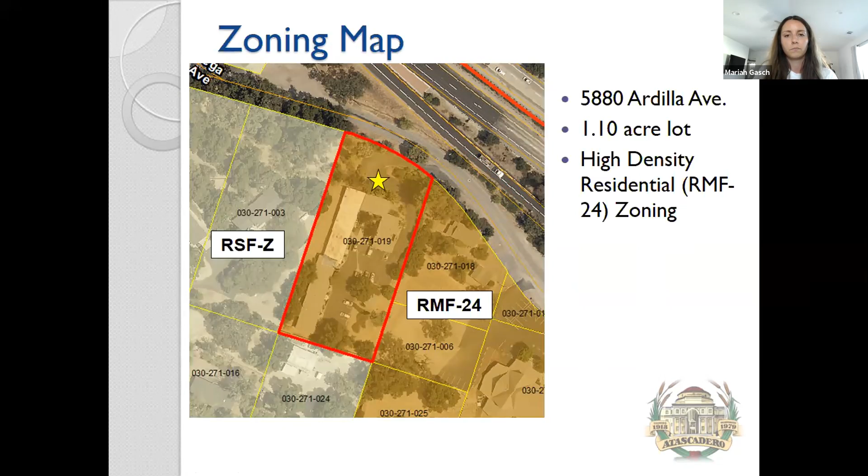Here's just a little bit of a better aerial. You can see where the existing driveway is and then the existing building, which we'll talk about.

A little bit of background about the site: it is currently developed with a multifamily building with a total of 13 units, including 1 manager's unit. The makeup of the building has 1 studio, 11 one-bedroom units, and a 3-bedroom manager's unit.

The project was presented to the Design Review Committee on March 11th, 2021. In addition to talking about the design, some of the big discussions were about the parking constraints and the accessibility for residents, which we'll talk about in a little bit.

So the project being proposed is to add a 2nd story onto the existing building. The 2nd story would have a total of 19 units, making 32 units total on the property. The 19 new units would consist of 11 studio units and 8 one-bedroom units, but the first floor unit configuration would stay the same.

The project also includes the addition of a new community building with a little bit of storage, as well as a courtyard for the residents to use. Some other changes are upgrades to the parking lot to modify for accessibility, as well as a fire truck turnaround. This also includes moving the trash enclosure.

To talk about the density, as I'd mentioned, this is a residential multifamily 24 lot, allowing 24 units per acre. So the zoning allows for a maximum density of 27 units on this property. However, state law allows projects with at least 20% of units affordable to receive a density bonus. So with this density bonus, the maximum density allowed on this property is 36 units, which the 32 units being proposed falls within.

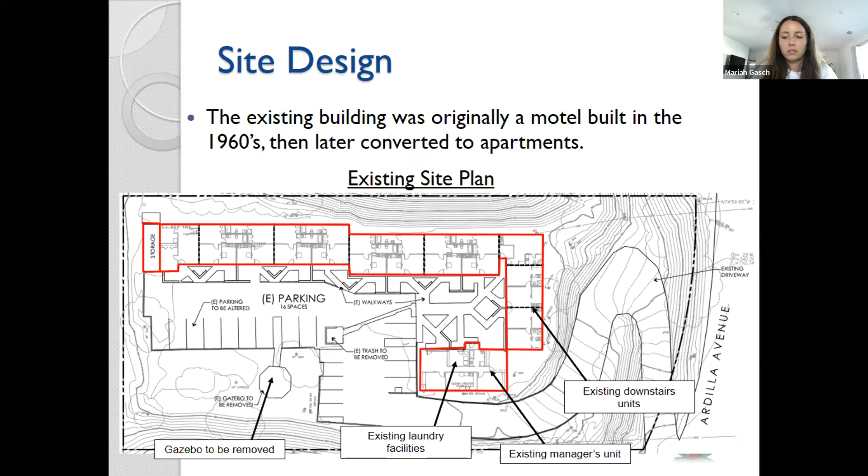There's a gazebo down at the bottom that's proposed to be removed. And you can see where the existing driveway is right now, and that'll be utilized with the new addition.

Adding a second story to the building increases the height from 9.5 feet tall to 22.5 feet tall. Again, the first floor would continue to have the 13 units. The manager's unit and laundry facility would be reconfigured a little bit, but they would stay largely the same. And then the new second story would have 19 new units.

Since the project is 100% affordable, the state code allows the applicant to request up to 4 concessions or exceptions to the city's requirements, which the applicant has requested some exceptions, which we'll talk about.

As I'd mentioned before, that driveway is going to continue to be utilized, but they are adding a new access for fire trucks to use, and this would just be used for emergency vehicles. So the applicant is proposing to add some removable bollards there, to ensure it would just be used by emergency vehicles and not by everyday drivers.

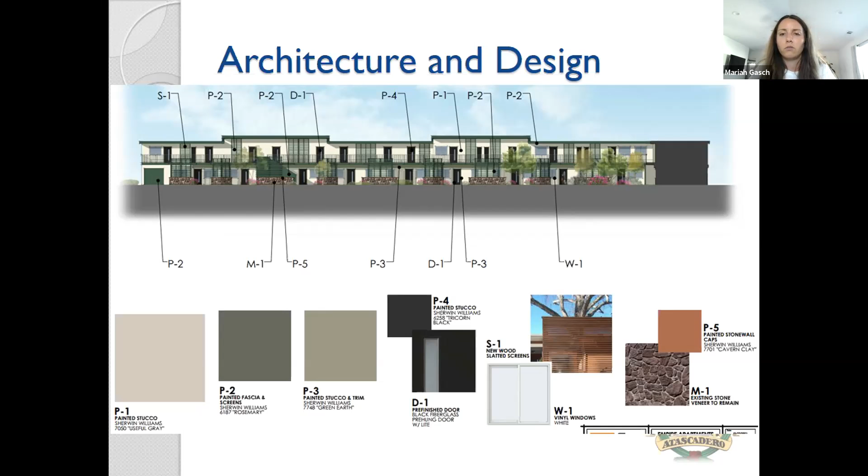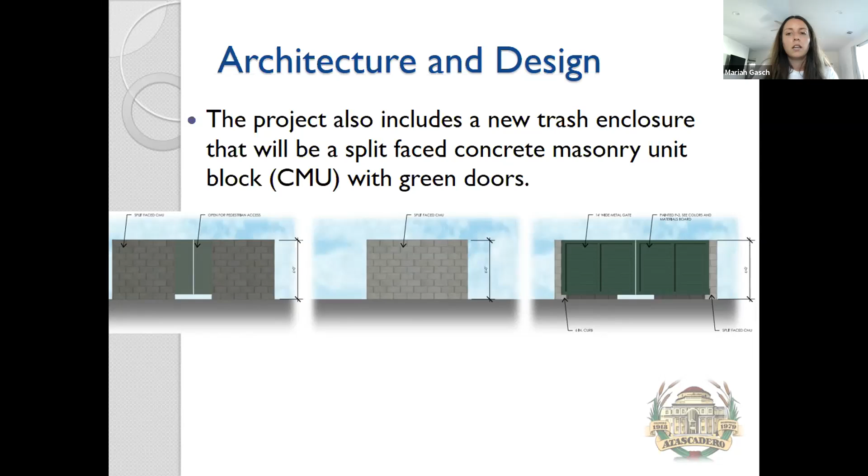Moving on to parking, this was one of the bigger discussion items that the design review committee had back in March. The existing parking lot has 16 parking spaces, and the applicant is actually proposing to reduce this down to 15 spaces. This would account for increasing accessibility, including a new accessible parking space, and it would include the new fire truck turnaround.

The state density bonus law sets a maximum parking ratio for projects providing affordable units. So when projects include affordable units, there's only so many parking spaces that the city can actually require. Per the state law, the city can require a maximum of 33 parking spaces. So obviously the 15 that the applicant's proposing is a pretty far reduction from this 33.

This is one of the concessions that they're requesting in accordance with the density bonus law I mentioned earlier. And here's just a table outlining the parking and the ratios being requested.

The Atascadero Municipal Code requires a total of 56 parking spaces for a project such as this. With the maximum density bonus requirements from the state, again, we can require up to 33, and then the applicant is proposing 15. So this is a pretty big reduction, but after talking to the owner and operator...

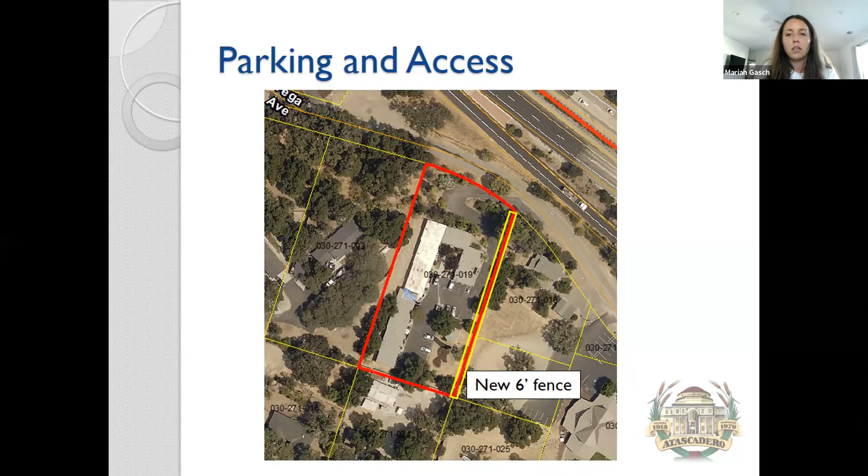Another thing the design review committee discussed was access to the site. There's a lot of foot traffic coming through adjacent properties to the east, so to discourage people from crossing those properties, a new 6-foot fence would be built along the property line to delineate it. The applicant has proposed this on their new site plan, and we've proposed a condition that this fence be added prior to requesting a final planning inspection.

Moving on to landscaping, approximately 41% of the site is proposed to be landscaped, well above the minimum 25% required by municipal code. The code also requires a minimum of 10% of parking areas to be landscaped, with shade trees provided a certain number of parking spaces away. Another requirement is that trash enclosures be landscaped, as well as street trees along the frontage, and a minimum 5-foot landscape strip within side yard setbacks.

These requirements are difficult to meet on this site because it's already built out. Adding some of these landscape requirements could result in a reduction to the already reduced parking or the number of units the applicant is able to build. So staff has made a finding to allow an exception, which we'll talk about shortly, and we're recommending no changes to the proposed landscape plan. A lot of the site near the adjacent property lines is pretty open with just grassy vegetation, and new vegetation would be added primarily around the parking lots and within the courtyards and walkway areas.

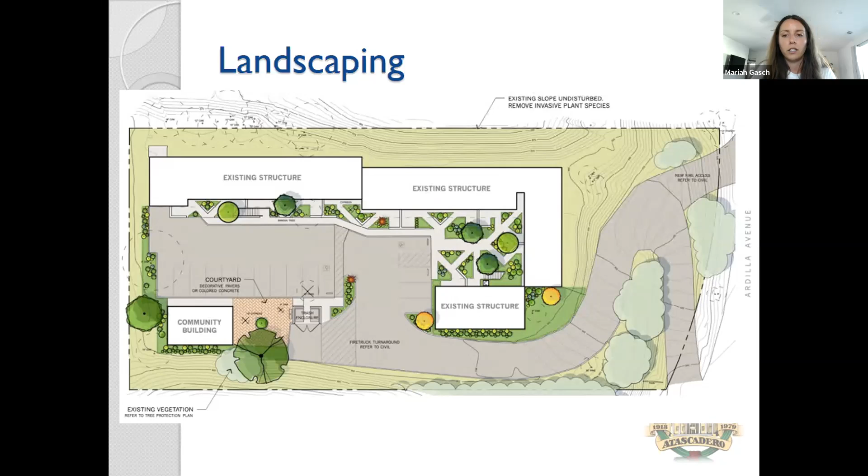Moving on to multifamily standards, the municipal code requires 10 cubic feet of enclosed storage per unit, not including closet space, as well as 9,600 square feet of open space, which can be provided in a shared location. The applicant is proposing 1 bedroom closet per unit, with Unit 3, the manager's unit, having slightly more. As for open space, the new courtyard would be almost 900 square feet, the existing courtyard between the buildings is about 1,250 square feet, and there are individual downstairs patios. These don't quite meet the municipal code requirements.

These are two more of the concessions the applicant is requesting with their density bonus. Staff is in support of this, again due to the existing layout and steep topography of the site. Additional storage and open space would also likely result in a loss of units or more extensive grading.

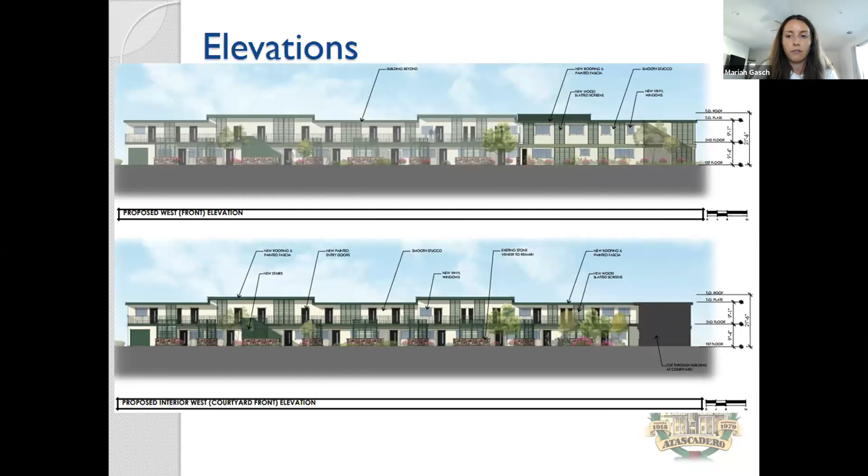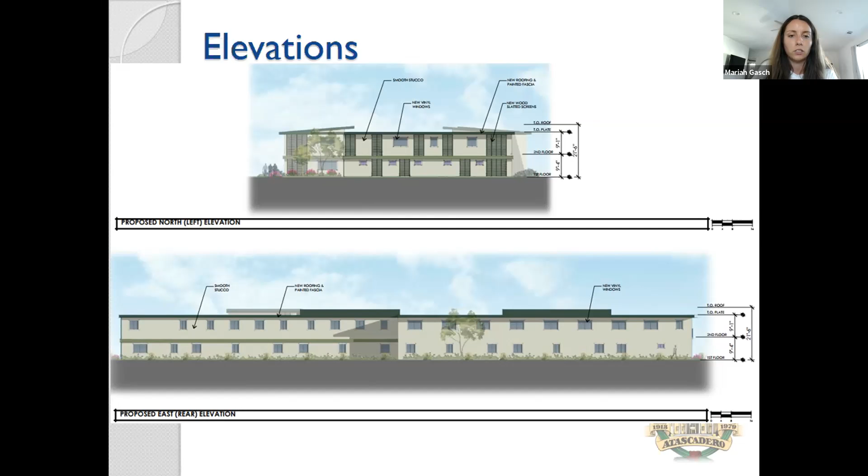Here are some elevations of the proposed project, which we looked at earlier, but you can see it matches what's there today—it's just getting taller, up to about 21.5 feet. In the top picture you can see the slanted roofs facing inward toward the inner courtyard area, and the back would be pretty simple with windows.

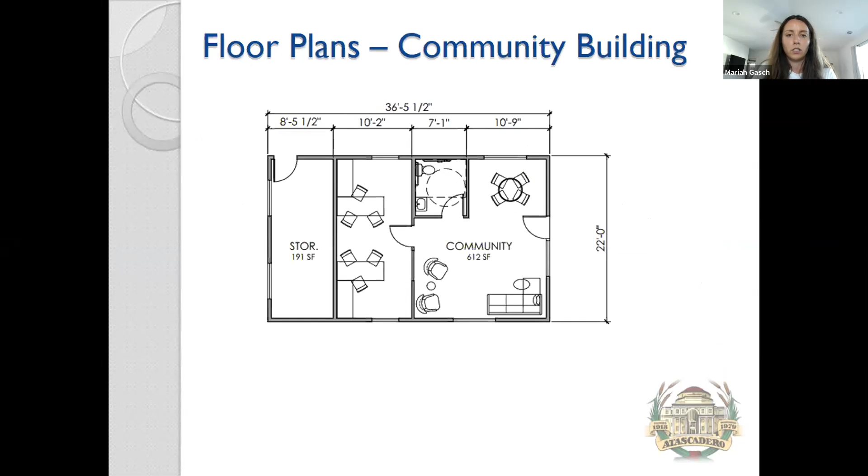Here are some finished floor plans. This is the first floor, which is existing. The second floor has quite a few more units, some smaller, and this is the proposed community space for residents to utilize.

The conditions of approval are within the staff report, but feel free to ask if you have any questions. The project qualifies for a Class 2 categorical exemption from CEQA for construction of an infill development.

Going back to the landscape exception finding, the municipal code allows the Planning Commission to grant an exception to landscaping if it can be found that existing vegetation, topography, or structural arrangement preclude the need for landscaping. We believe this can be met since the site is already developed and has significant topography.

Staff's recommendation is that the Planning Commission adopt the draft resolution approving the amendments to the previous conditional use permit, allowing the addition of 19 units to the existing apartment building for a total of 32 units, consistent with the previously approved project, based on findings and subject to these conditions of approval. As always, the Planning Commission can approve modifications to the project, determine more information is needed and refer the item back to staff, or deny the permit. Staff is available for questions.

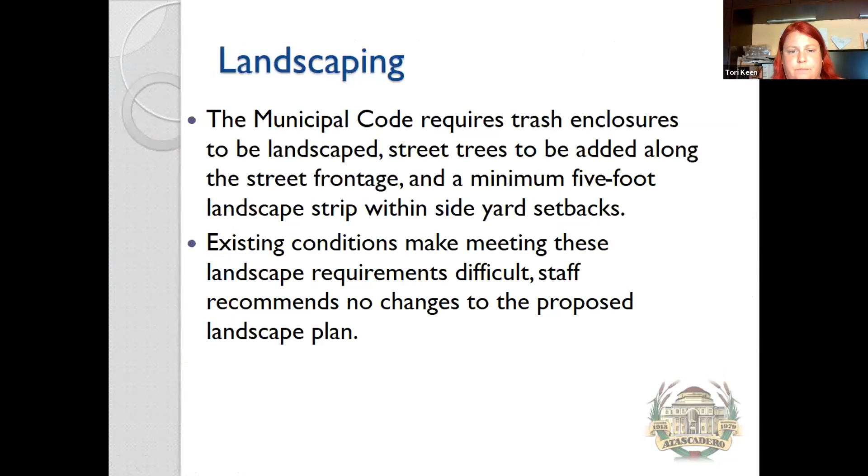Yeah, let me pull up a picture here. Mariah, related to that, has the applicant submitted any profiles of that? The slopes are really steep through there, so I'm curious how they're going to accommodate that drive right there.

Yeah, so the applicant, we did go back and forth with them on that slope, and they did confirm - I can't remember, Kelly, do you recall what the slope was? Our fire chief took a look at it and confirmed that the slope met the fire truck standards. I think the idea is that it's not exactly the best approach for everyone to be using. It's kind of a sharp left turn there, and it's still a pretty steep driveway. So I think that's the reason.

And then having two open driveways gets kind of confusing. So I think that's the reason for keeping the existing driveway and adding this one just for fire truck access or emergency access, I suppose.

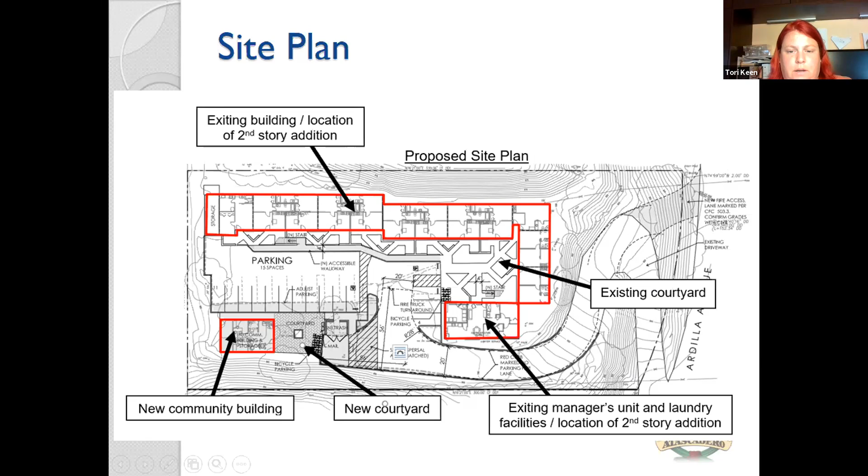Can you show the Google image of the map? Okay, so can we, I hate to do this, but that tree that's right there, could we have them cut that down for better viewing? I don't think they'd need to put landscape somewhere else, but it seems like a really bad blind corner. I've driven down that road a few times and people do speed up to that intersection.

So since we have an opportunity to do something about it, I'm just wondering what our options are. Or are you referring to the tree in the right of way right there? Yep, that one right there.

Yeah, I think what we could do is add a condition that the city engineer review the sight distance out of the existing driveway, and that they implement any recommendations he has for vegetation removal. Because if we are going to increase the traffic there, I think we need to take that into account and make sure people can get in and out of that driveway safely.

That's it for me. Jason? Thank you, Tori. I don't see any pedestrian walkways, any sidewalks or anything along the road, so I'm kind of confused. The people who live here, if they don't drive, they ride bikes or walk, but that's a precarious road to be walking along the side of like that. Is there any plan for putting in sidewalks in that area?

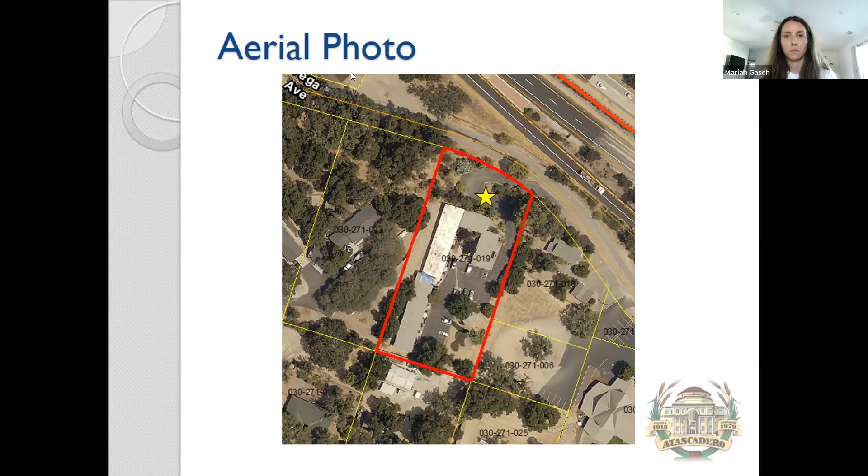If the applicant or their representative would like to speak to the planning commission, you will need to unmute.

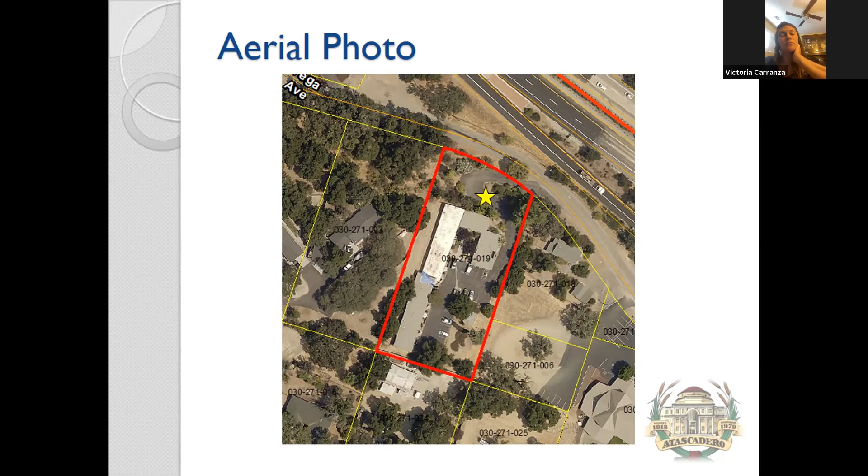Obviously that's something everybody would like to see happen broadly, but it's very rare and extremely difficult to produce. As a result, you see the severe housing crisis we have now. And if we don't start thinking outside the box on ways to solve the situation, it's obviously going to just keep getting worse.

One thing I wanted to mention is that the Empire Inn consists of 13 housing units now, and we're going to 32. But as was discussed tonight, it's important to look at how it's actually operating. We've been operating it for close to 30 years now, since 1991, so we know the kind of clients, how it functions, and what the needs are, and we feel very confident in the expansion and the parking ratios.

As already mentioned, it's pretty much 100% occupied by what we classify as special needs households, and we control who moves into the housing and who does not. Of course, they have to income qualify and be low income. But if they don't fit the needs of the property, like if there's too many cars, we don't rent to them. That hasn't been the case though.

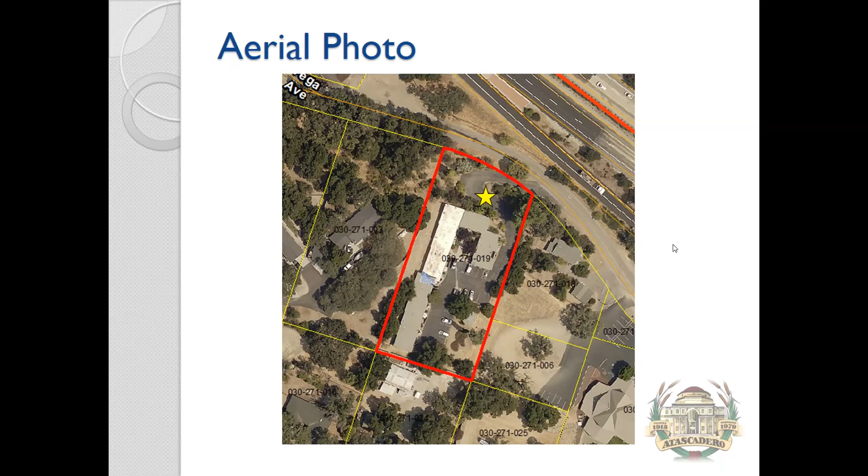Hi, I'm Adriana from Arris. Mariah, I don't know if it's possible for me to share my screen. Yeah, let's see. Are you able to now? Yes. See?

Okay, so I'm just going to give an overview. Mariah's done a great job already, so I'll be brief on anything that overlaps.

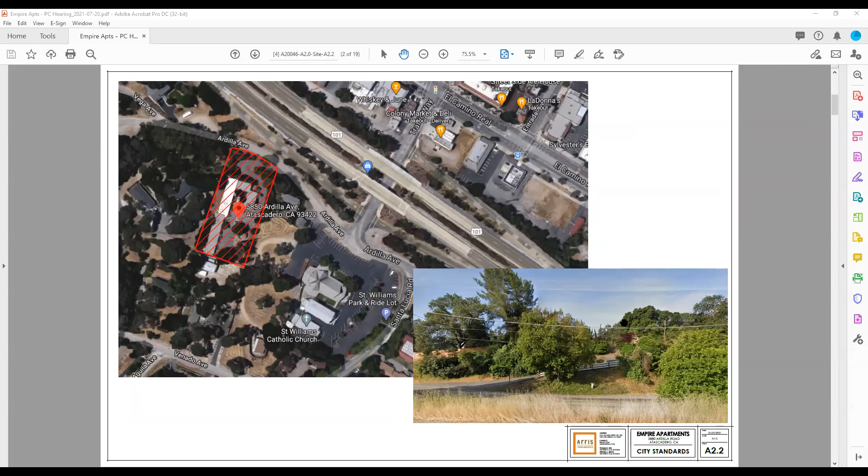Just a little zoom out of this site area too - we are close to 101, but also very close to El Camino, so the walking and biking is convenient, as we've already noted. This picture shows the driveway off of Ardilla and how it's a steep sloping site, just so we're all on the same page. This will be 100% affordable for rent, owned by HASLO and managed, located near El Camino and Traffic Way, close to transportation and amenities.

We're adding a second story over the existing 12-unit building, increasing the total number of units from 12 to 31. We're also adding a new community building for residents. Per the state density bonus law, the city is required to provide 4 incentives or concessions, and we are requesting, as Mariah mentioned, reduced parking, reduced open space, and reduced indoor storage.

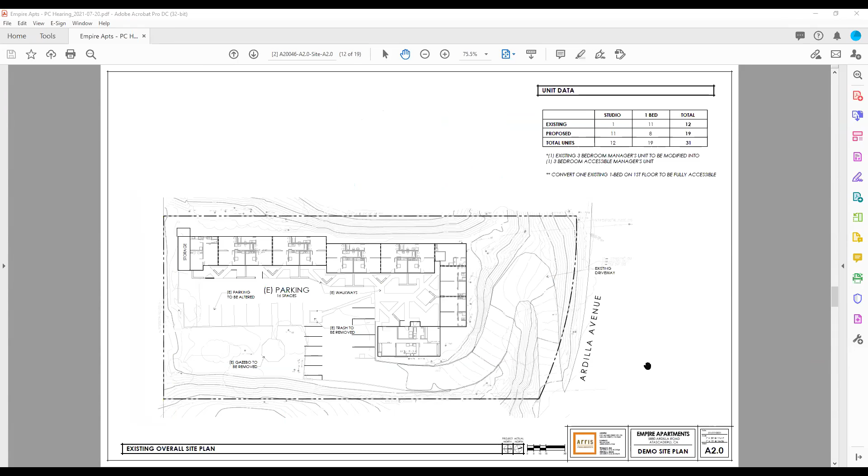This is the existing site, and this is the proposed. This is the entire area we're putting a second story over to gain the new units. This is the new community building over here. This is the new courtyard, and this is an existing courtyard that already exists. Each unit on the ground floor also already has kind of a patio with planters.

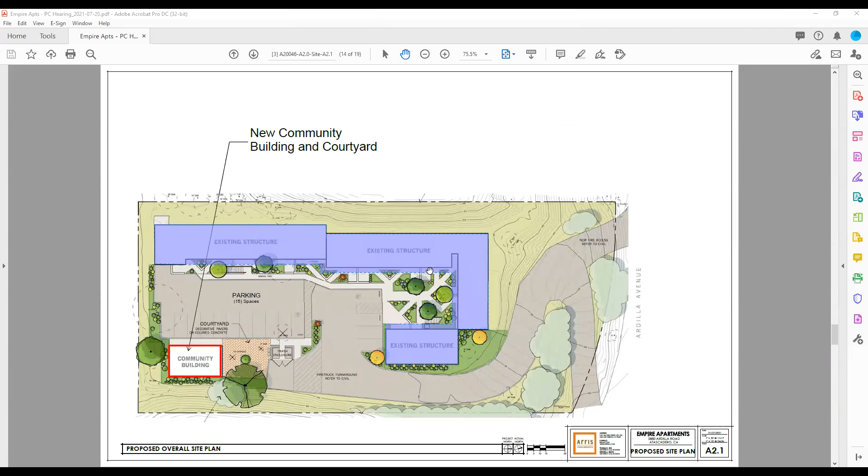The parking was modified mainly for accessibility - for all the units, we have some disabilities, and we want to meet code requirements but also tend to those who live in these units. So we have an accessible aisle, which wasn't there before - you would have to go into the parking drive aisle. That's what shifted these parking stalls down. We also have actual accessible stalls with the appropriate drive aisle. This also allowed for the fire truck turnaround that wasn't there currently.

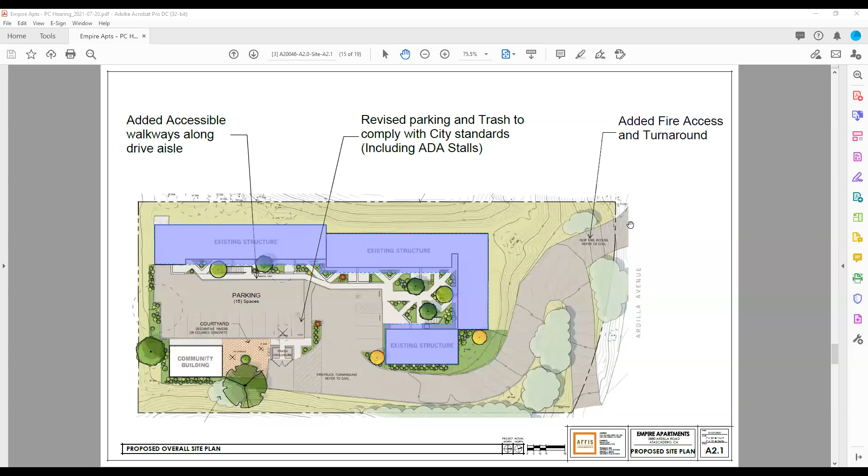And then this is the new fire access as previously mentioned. We've also added the bike parking and the 6-foot fence. These are just images showing the second story on top, the community building. And that is it - I will also be available for questions as well.

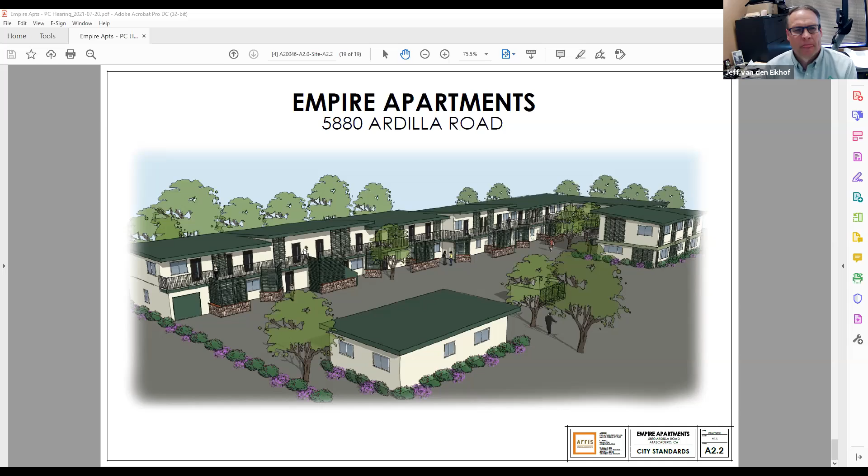I have one, Adriana, following up on one of the questions previously. I didn't see any profiles or anything of the fire access road or any slopes. Just curious about that - that slope seems really steep. Wasn't sure if you were going to have to adjust the entire driveway. It will be a small portion and there will be retaining walls. I do have... let me see, I think I only shared that specific thing.

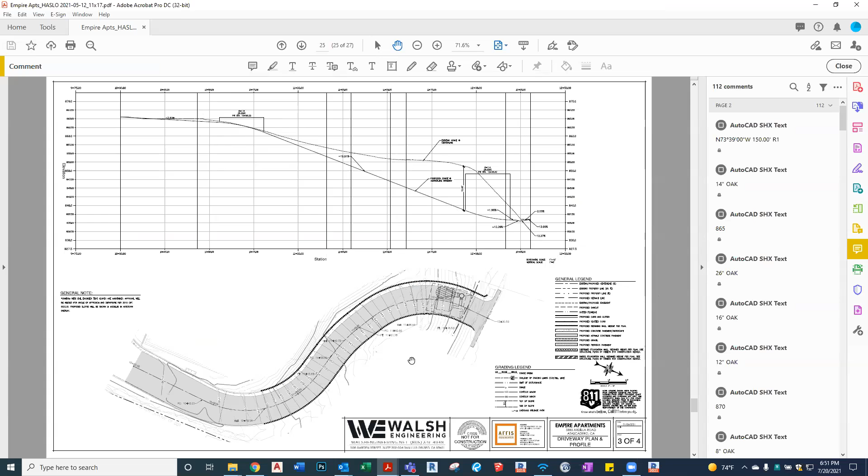So I'll share my whole screen. This is the profile of that driveway, so it is very steep. And this was the existing profile, as you can see, so it's extensive work here. I did not follow up with Walsh Engineering prior to this meeting, but I do believe we are abandoning it after looking closer, because of how much regrading we are doing. I apologize, Mariah, for not looking at that before this meeting.

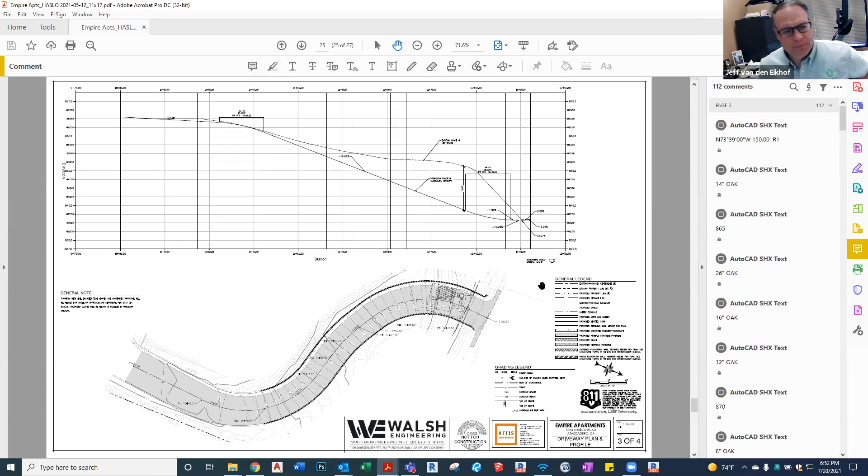It looks way different. That would make sense, and it would actually improve the sight distance from what I can see there. Yeah, I was curious as to how that was going to happen, because the steepness of the grade, it didn't seem like you could have that other drive.

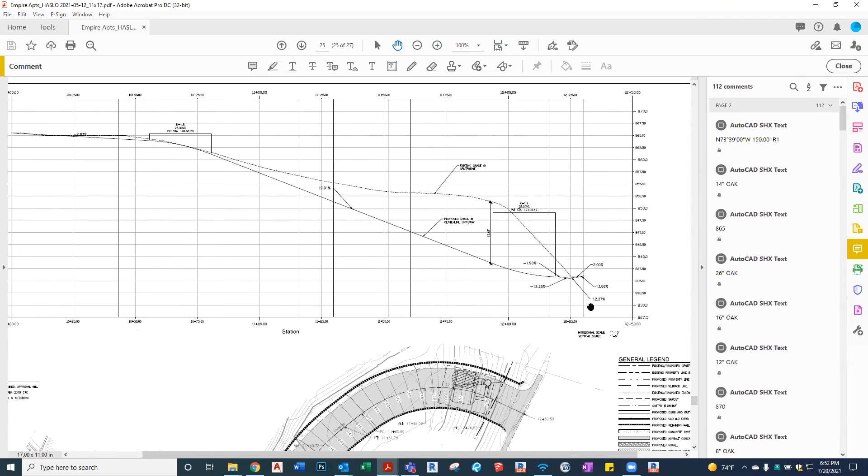Right, yes. The dashed line here is the existing, if you can zoom in a little bit. It's still quite different - still steep, but still within the allowable. I see, instead of doing the jump up there. Okay, Randy, did you have questions?

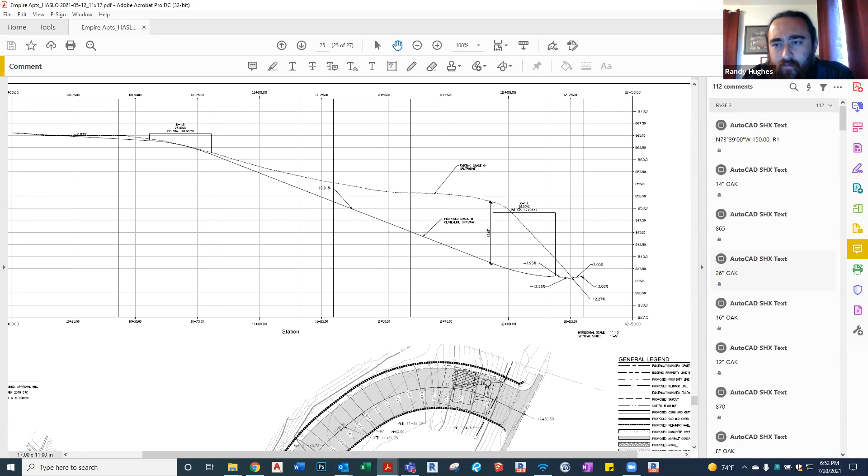Yeah, actually, I understand that this is geared towards more like special needs. Are there going to be any situations where someone might need a caretaker, or are you guys kind of more just filtering that out in the process of when you're deciding who to rent to?

I'm going to let HASLO comment on that. Scott, would you mind chiming in on that? If you're trying to talk, you're muted. I don't have any controls on my computer, so I think you guys have to unmute me maybe somehow. But can you hear me now? Yeah. Yes. Oh good, okay.

So, with respect to caretakers, we wouldn't deny somebody, but it's very unusual to have a caretaker that would live at the unit. There might be somebody that comes in to help with daytime stuff, and I think there's probably a couple there right now having a worker come in for a couple hours a day. Typically, especially because these are poor people, if they need help with housekeeping or activities of daily living, they apply through a program called In-Home Supportive Services, but it's not easy to get those hours - they dole them out sparingly. So it is possible, we just don't know who's going to walk in our door needing those kinds of things.

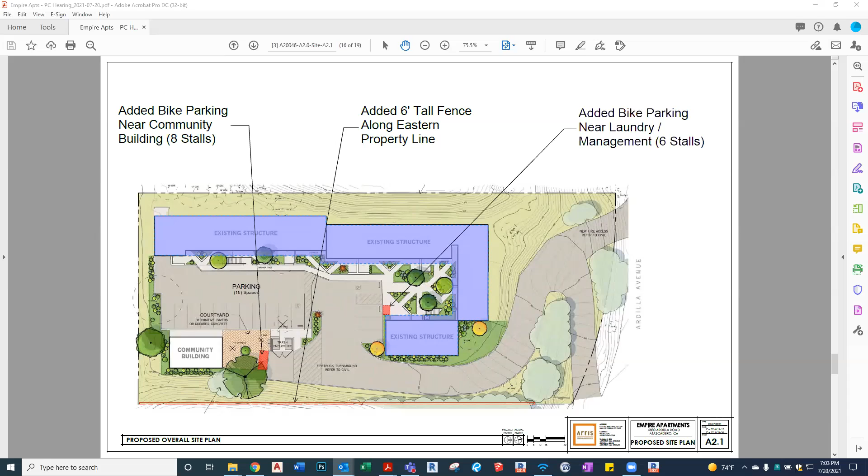We always have a local preference. We advertise and do outreach, and it always fills up with local. Now, how local gets defined, people move around so much. Our first preference would be Atascadero, but then you have somebody who's living in Templeton, but they grew up their whole life and went to Atascadero high school. So are they considered local? But we always have local preferences on all our projects, and that's what we would do on this one as well.

Okay. Any other questions? Oh, I just had one.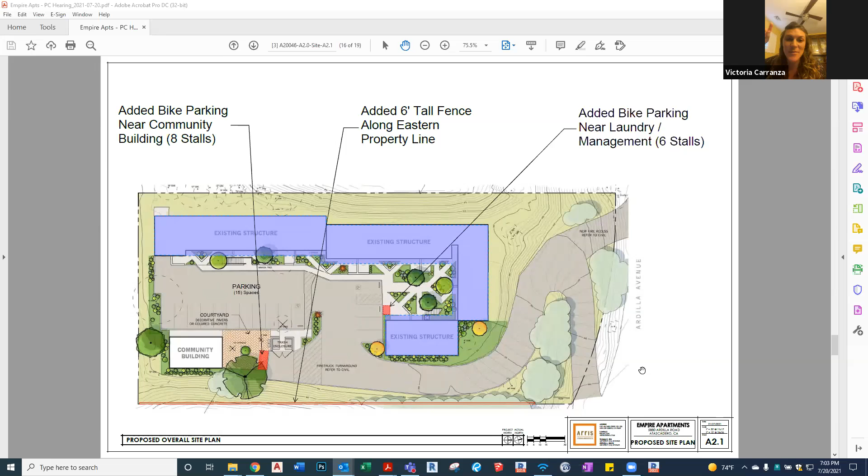This is a joke about the weeds here, but I actually wanted to ask about the weeds, the landscaping behind the building. It said invasive species removal, and since we don't really know much about that at all, I wondered if that was something the city should put on their radar as an issue in general. But what kind of invasive species would you be removing?

I'm not 100% sure, it was the landscape architect who did that. So I don't have names or anything, but I think the idea is just to clean up the site.

Okay, thank you. Well, we'll go ahead and open it up to the public. Beforehand, we received a couple letters. Annette, can we have those read into the record?

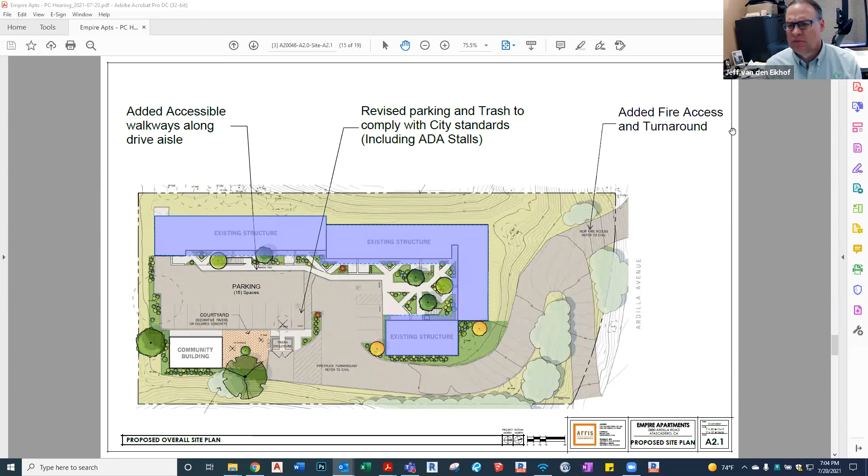Yes, can you all hear me? Okay, so the first one here is from Robert Bass, and it says: Dear Planning Commission folks, first I want to point out that I respect the work of this commission for our wonderful city of Atascadero. I have lived here in the same apartment at 5880 Arolla Avenue, Atascadero Unit A since February 1992, almost 30 years. I love our city and our people, and because I am a follower of Jesus Christ, I am to honor with authenticity the authority over me, which includes city government and planning.

I just want you folks to know I don't come with an axe to grind. So here are my serious concerns. Both the driveway and the blind corner at the bottom of the driveway are serious safety concerns if you are driving a car. If you are a pedestrian or in a wheelchair, such as myself, this driveway blind corner is always a super safety concern. In 2011, I happened to have been driving my van equipped for wheelchair down the driveway, of course looking both ways as usual, and creeped out as I do to see better around the blind corner. And bam, I was what they call T-boned by a car speedily rounding the bend.

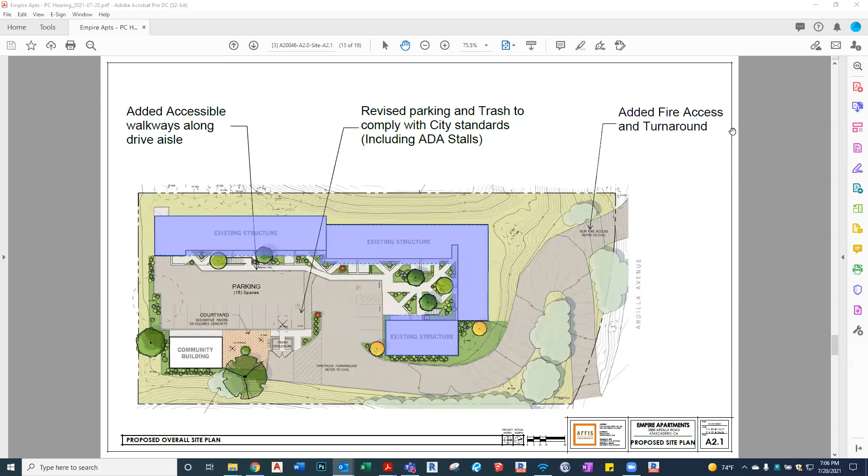Luckily, that car hit me farther in the back of the van and not the driver's seat area, but I still suffered head injury and concussion and was transferred to Twin Cities by ambulance. If I had been in my wheelchair and for whatever reason not hugging against the bushes as I normally do, I would surely be dead now. This whole driveway blind corner is a death trap waiting to happen. Mark my words. I am 1000% against adding more units and more people to an already super unsafe area. There is zero safe lighting for that area at night, so it is so dark at night. I have gone off into the bushes on the right side in my electric wheelchair because it was so dark I could not see where I was going at all. I got stuck and could not get out. Unfortunately, one of my Good Samaritan neighbors just happened to be driving by, saw me waving from the bushes, and pulled me out.

The whole area is so unsafe. If the city does not aggressively make that area safe with stop signs and lighting, there will be more serious bodily injury or death.

It's death waiting to happen. If I could be more than 100% against adding more units, I would. First, make the area safe for current residents. Many pedestrians walk up that driveway and it's so dark. People fly up the driveway too, like it's a speedway at times. You all understand the picture I am trying to paint.

Thank you for your consideration in this matter. I stand with authority of our city government, and I hope and pray adding units to an already very unsafe area will be declined. Sincerely, Robert Bass, 62-year-old grandfather, father, and husband, and resident close to 30 years of beautiful Atascadero.

Second letter is from Michael Norlock, and it says: please note, this proposal is marked for 5880 Arolla Road, although that address does not exist. It is actually 5880 Arolla Avenue. There are two different streets. In addition, the community building is fraudulently misleading, as it is not going to be available to the Atascadero community, but rather the proposed building residents only. The proposal presents numerous safety and well-being issues that will greatly impact the surrounding area.